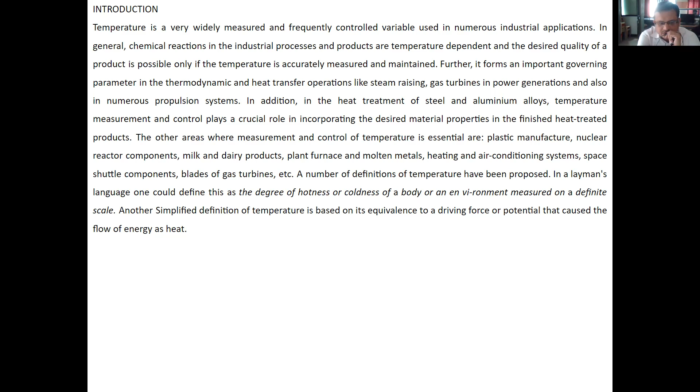Thus, we can define temperature as a condition of a body by virtue of which heat is transferred to or from other bodies. Further, in the kinetic theory of gases and in statistical thermodynamics, it is shown that temperature is related to the average kinetic energy of molecules or atoms of which the material is made.

Finally, the definition of temperature in the thermodynamic sense is based on the ideal Carnot cycle. According to this, it is defined as a quantity whose difference is proportional to the work obtained from a Carnot engine operating between a hot source and a cold receiver. It may be noted that there is a marked difference between the quantities temperature and heat.

Temperature may be defined as degree of heat, whereas heat is taken to mean quantity of heat. For example, a bucket of warm water would melt more ice than a small spoon of boiling water. The warm water in the bucket obviously contains a greater quantity of heat than that in the spoon containing boiling water, but its temperature is lower than the boiling water. In fact, that is readily apparent if a finger is dipped in both the vessels.

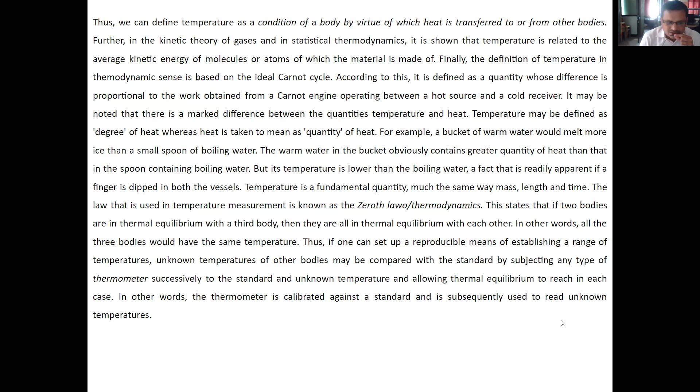Temperature scales. Two temperature scales in common use are the Fahrenheit and Celsius scales. These scales are based on a specification of the number of increments between the freezing point and the boiling point of water at standard atmospheric pressure. The Celsius scale has 100 units between these points, while the Fahrenheit has 180 units. The Celsius scale is currently more in use because of the adoption of metric units.

However, the absolute temperature scale based on the thermodynamic ideal Carnot cycle has been correlated with the Celsius and Fahrenheit scales as follows. Kelvin, that is absolute temperature on the Kelvin scale, is equal to degree centigrade plus 273.15, where degree centigrade or Celsius is the temperature on the Celsius scale. R, that is absolute temperature on the Rankine scale, is equal to degree Fahrenheit plus 459.69, where F is the temperature on the Fahrenheit scale.

The 0 points on both scales represent the same physical state, and the ratio of two values is the same regardless of the absolute scale used, that is T1 by T2 Rankine is equal to T1 by T2 Kelvin.

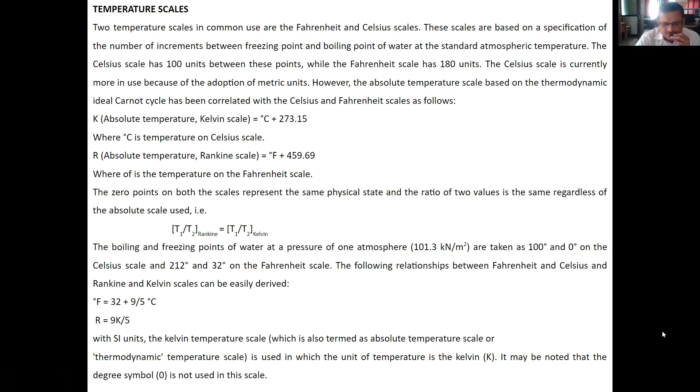Now this is the international practical temperature scale. To enable the accurate calibration of a wide range of temperatures in terms of the Kelvin scale, the International Practical Temperature Scale IPTS-68 has been devised. It lists 11 primary fixed points which can be reproduced accurately.

Some typical values of primary fixed points: first column the point, second temperature in Kelvin, third temperature in degree Celsius. First is triple point of equilibrium hydrogen, equilibrium between solid, liquid and vapor phases of equilibrium hydrogen: 13.18 Kelvin, minus 259.34 Celsius. Second, boiling point of equilibrium hydrogen: 20.28, minus 252.87. Triple point of oxygen: 54.36, minus 218.78.

Boiling point of oxygen: 90.18, minus 182.96. Triple point of water: 273.16, 0.01. Boiling point of water: 373.15, 100. Freezing point of zinc: 692.73, 419.58. Freezing point of silver: 1235.58.

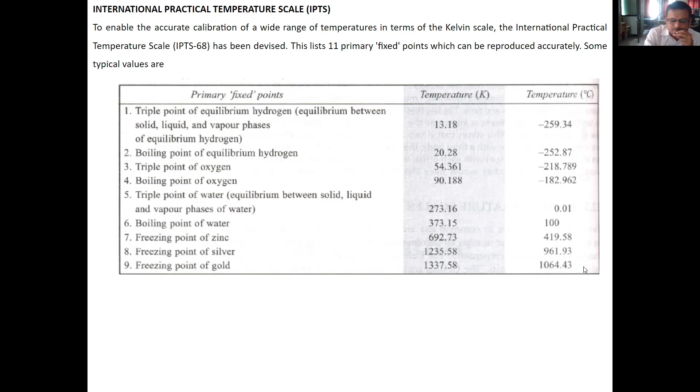In order to establish a scale completely, a means of interpolation between the fixed points is required. Resistance thermometers are used for this purpose for temperatures below 630 degrees Celsius, and thermocouples between 630 and 1064 degrees Celsius. Above this temperature range, radiation methods are used to extrapolate the scale.

Apart from the primary standard points, there are 31 secondary points on the International Practical Temperature Scale, which form a convenient working standard for the workshop calibration of temperature measuring devices. Some typical values of these points are given in the table.

Secondary points: sublimation point of carbon dioxide, first column the point, second column temperature in Kelvin, third column temperature in degree Celsius: 194.674, minus 74.47. Freezing point of mercury: 234.28, minus 38.86. Equilibrium between ice and water, that is ice point: 273.15, 0.

Melting point of bismuth: 544.59, 271.44. Melting point of lead: 600.65, 327.50. Boiling point of pure sulfur: 717.82, 444.67. Melting point of antimony: 903.87, 630.74.

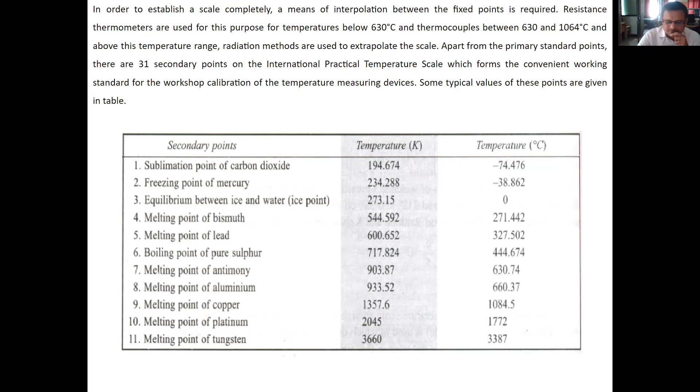Now, measurement of temperature. Temperature cannot be measured directly, but must be measured by observing the effect that temperature variation causes on the measuring device. Temperature measurement methods can be broadly classified as follows: first, non-electrical methods; second, electrical methods; and third, radiation methods. Now, first is non-electrical methods.

The non-electrical methods of temperature measurement can be based on any one of the following principles: first, change in the physical state; second, change in the chemical properties; and third, change in the physical properties.

As mentioned before, the temperatures at which a number of pure substances change their physical states are used for the calibration of temperature scales. But these devices give one particular value of a unique temperature corresponding to the change in the state of the substance. Hence, these are not suitable for measuring a range of temperatures.

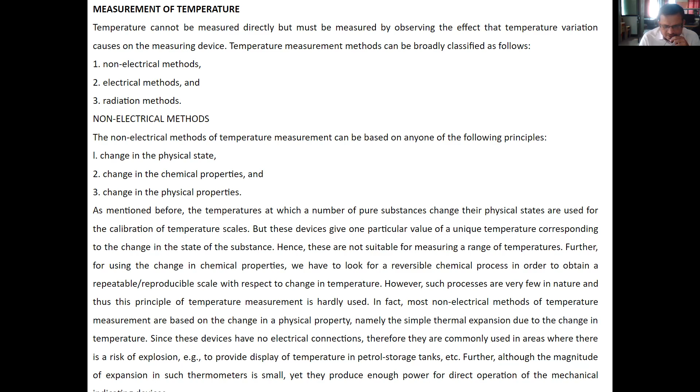These devices have no electrical connections, therefore they are commonly used in areas where there is a risk of explosion, for example, to provide display of temperature in petrol storage tanks, etc. Further, although the magnitudes of expansion in such thermometers is very small, yet they produce enough power for direct operation of the mechanical.

Now, first is the bimetallic thermometer. This type of thermometer also employs the principle of solid expansion and consists of a bimetal strip, usually in the form of a cantilever beam. This comprises strips of two metals having different coefficients of thermal expansion, welded or riveted together so that relative motion between them is prevented. An increase in temperature causes the deflection of the free end of the strip as shown in figure. Assuming that metal A has the higher coefficient of expansion, the deflection with the temperature is nearly linear depending mainly on the coefficient of linear thermal expansion.

Invar is commonly employed as the low expansion metal. This is an iron and nickel alloy containing 36% of nickel. Its coefficient of thermal expansion is around 1/20th of the ordinary metals.

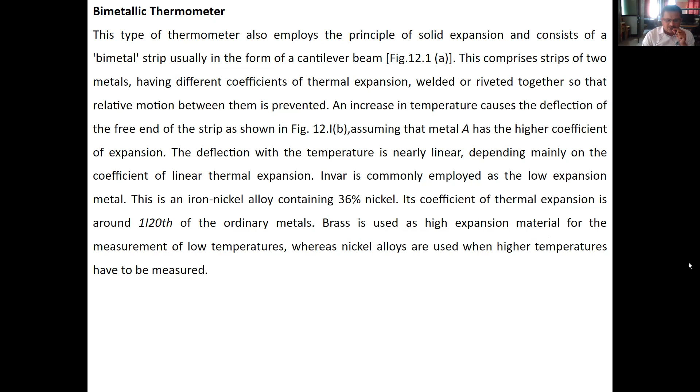One end of the helix is anchored to the casing and the other end, which is free, is conveniently connected to the pointer, which sweeps over a circular dial graduated in degrees of temperature. In response to the temperature change, the bimetal expands and the helical bimetal rotates at its free end, thus turning the stem and the pointer to a new position on the dial.

The length of the stem may be up to about 0.6 meter, allowing the bimetal element enclosed in a protective sheath to be submerged in a hot substance without the indicator itself being subjected to excessive temperatures.

Bimetallic thermometers are usually employed in the range of -30 to 550 degrees Celsius. Inaccuracies of the order of plus or minus 0.5 to 1% of full scale deflection are expected in bimetallic thermometers of high accuracies.

In addition to temperature indication, bimetal elements find a wide range of applications in combined sensing and control elements in temperature control systems, mainly of the on-off type, that is thermostats. Movement of the strip has sufficient force to actuate the control switches employed in domestic ovens, electric irons, car winker lamps, and refrigerators. In addition, these devices are also used as compensating elements for the ambient temperatures in pressure thermometers, aneroid barometers, and as balance wheel compensators in some watches.

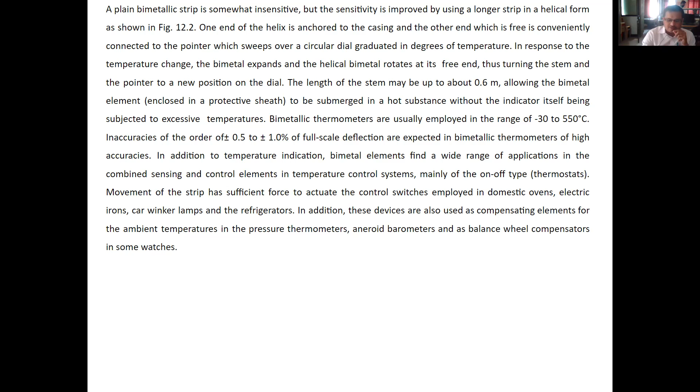Therefore, this is the bimetallic thermometer and this is the bimetallic helix thermometer. The bimetallic thermometer consists of two different materials having different coefficient of linear expansion or thermal expansion.

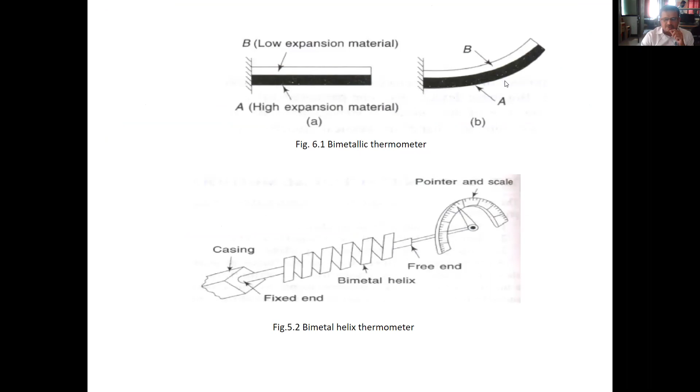The bimetallic strip has the advantage of being a self-generating type instrument with low cost, practically no maintenance expenses, and stable operation over extended periods of time. However, its main disadvantage is its inability to measure rapidly changing temperatures due to its relatively higher thermal inertia.

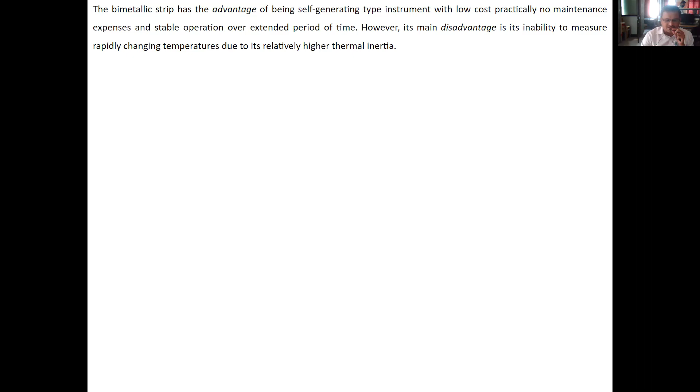Next is the liquid in glass thermometer.

The liquid in glass thermometer is one of the most common temperature measuring devices. Both liquid and glass expand on heating and their differential expansion is used to indicate the temperature. The lower temperature limit is -37.8 degrees Celsius for mercury, down to -130 degrees Celsius for pentane. The higher temperature range is 340 degrees Celsius. Boiling point of mercury is 357 degrees Celsius, but this range may be extended to 560 degrees Celsius by filling the space above mercury with N2 at higher pressure, thereby increasing its boiling point and range.

The precision of the thermometer depends on the care used in calibration. A typical instrument is checked and marked from 2 to 5 reference temperatures. Intermediate points are marked by interpolation. The calibration of the thermometer should be occasionally checked against the ice point to take into account the aging effects. Precision thermometers are sometimes marked for partial or total immersion and also for horizontal or vertical orientation.

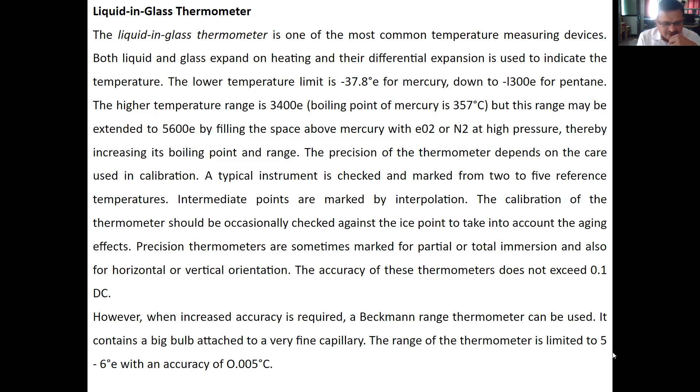Range of the thermometers is limited to 5 to 6 degrees Celsius with an accuracy of 0.005 degrees Celsius.

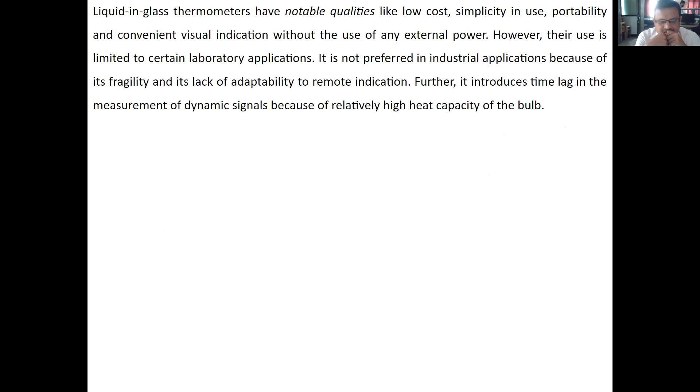Liquid in glass thermometers have notable qualities like low cost, simplicity in use, portability, and convenient visual indication without the use of any external power. However, their use is limited to certain laboratory applications. It is not preferred in industrial applications because of its fragility and its lack of adaptability to remote indication. Further, it introduces time lag in the measurement of dynamic signals because of relatively high heat capacity of the bulb.

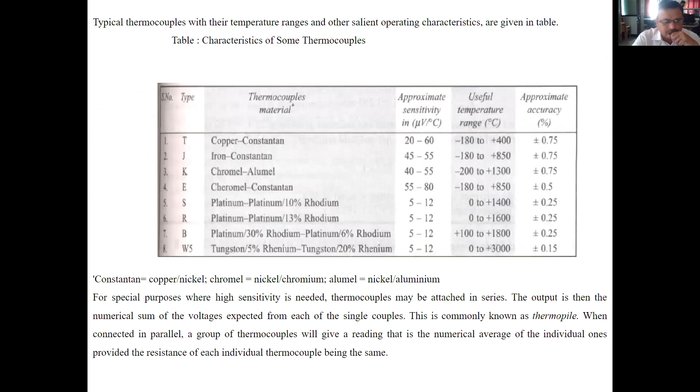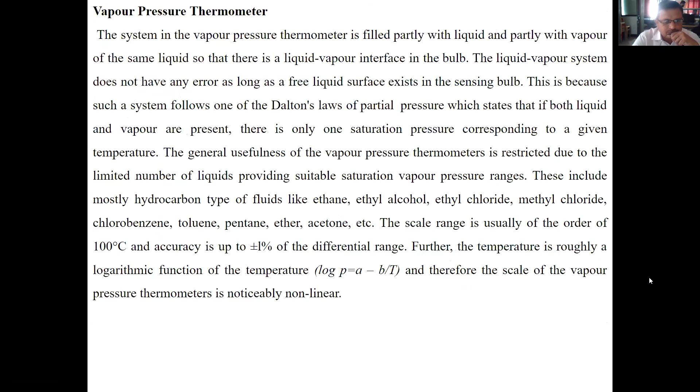Now we'll see these pressure thermometers. Pressure thermometers work on the principle of fluid expansion due to an increase in temperature in a given volume of the temperature measuring system. It is one of the most economical, versatile, and widely used devices in industrial temperature measurements.

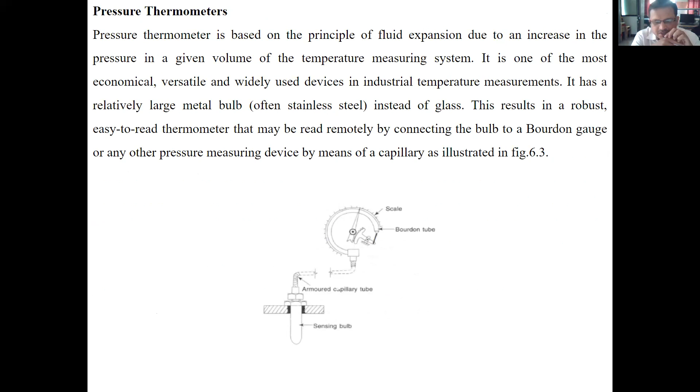The entire assembly of the bulb, capillary and gauge is calibrated directly on the basis of pressure change corresponding to the temperature change. The bulb of the thermometer may be filled with either a liquid, a gas, or a liquid vapor mixture, and depending upon the type of fluid, the thermometer is termed as mercury in steel thermometer, constant volume gas thermometer, or vapor pressure thermometer respectively.

Fluid expansion thermometers are low in cost, self-operated type, rugged in construction with no maintenance expenses, stable in operation, and accurate to plus minus 1 degree Celsius. Further, the response of these instruments can be increased by using a small bulb connected to an electrical type of pressure sensor connected through a short length of capillary tube.

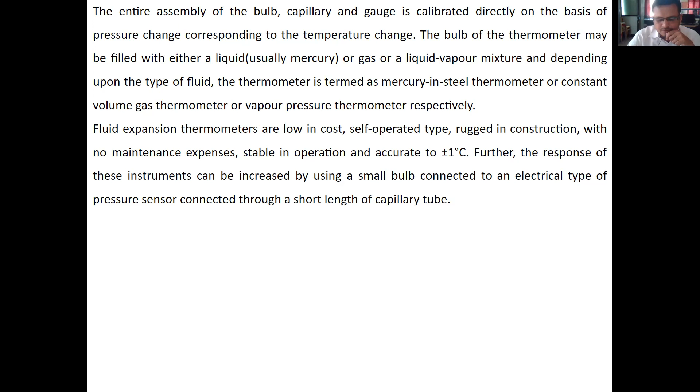And now this last thermometer we'll see: mercury in steel thermometer. The mercury in steel thermometer has a near-linear scale. Sufficient power is available to operate a recording pen if required, as the total expansion of mercury is dependent not only on the bulb temperature but also on the temperatures of the capillary tube and bourdon tube.

The system is subject to ambient temperature errors. Further, the magnitude of these errors depends on the ratio of the volume of mercury in the capillary at the measured temperature to the volume of the bulb. A reduction of the error is obtained by making the sensing bulb volume considerably greater than that of the capillary.

This inevitably increases the thermal capacity and hence the thermal lag. The bulb size is therefore a matter of compromise. The volumes of the capillary and bourdon tube are made as small as transmission distance and the required size of display could allow.

Pressure thermometers are often connected with long capillary connecting tubes for remote measurements of the order of 100 meters. Ambient temperature error may be reduced by suitable compensation techniques.

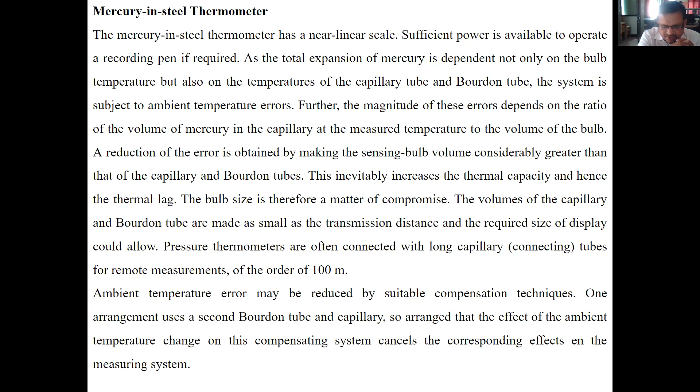One arrangement uses a second bourdon tube and capillary, so arranged that the effect of ambient temperature change in this compensating system cancels the corresponding effect in the measuring system.

Another potential source of error is the change in pressure head, which is introduced by any change in the relative levels of the bulb and the display. If the bulb is raised by height H from the calibration level, then the bourdon gauge experiences an increase in pressure equal to rho GH. This increase in level introduces an error in the indicator.

This error is constant for any specified relative position of the bulb and display and may be removed by means of the zero adjustment of the indicating mechanism.

The temperature range over which mercury in steel thermometer may be used is -25 to 550 degrees Celsius, when the mercury is filled under pressure in the steel tube.